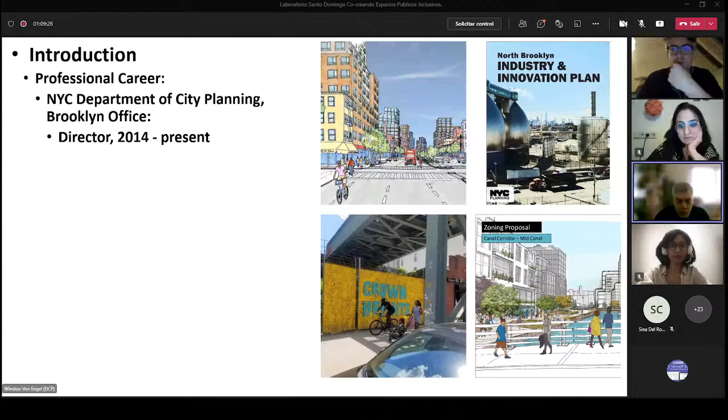Hopefully this walks you through the New York City experience with streets, with streetscape, and how we've evolved over time in treating streets and how we look at them. So first off, who am I? As Roland already introduced me, I'm an urban planner. I work and live in New York City, and my family is from Austria as well as Germany. I started my professional career at the Department of City Planning in New York City in the Brooklyn office, first as a planner for several lower income neighborhoods in Brooklyn, then as deputy director of the office for Brooklyn. In 2014, I became the head of that office. Our office is about 20 urban planners and urban designers working for Brooklyn.

Some of the day-to-day work we do includes conducting studies on land use, on zoning, for economic development. We study our own population—we're actually very good at that, particularly. We also manage the public review process for changes in land use. So when somebody wants to build a different kind of building than what the zoning allows, we review those applications and then submit them for the public to decide.

A bit of an overview of New York City. We're made up of 5 main city pieces, which we call boroughs. We're now at a population peak of over 8.8 million people, despite the pandemic. For the first time in decades, New York City actually grew faster than the rest of the country, and the fastest growing borough was Brooklyn at 9.2%. But just to give you an idea, the population of Brooklyn is now at the same level it was 70 years ago—so we're only catching up to the losses in population from the past 70 years. Other boroughs like Queens, the Bronx, and Staten Island have actually exceeded their prior peaks.

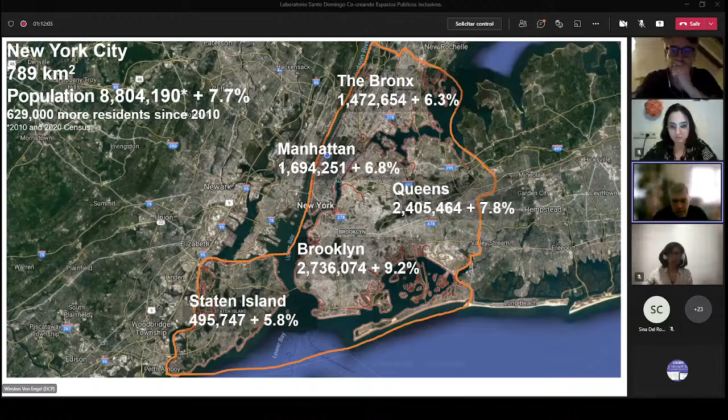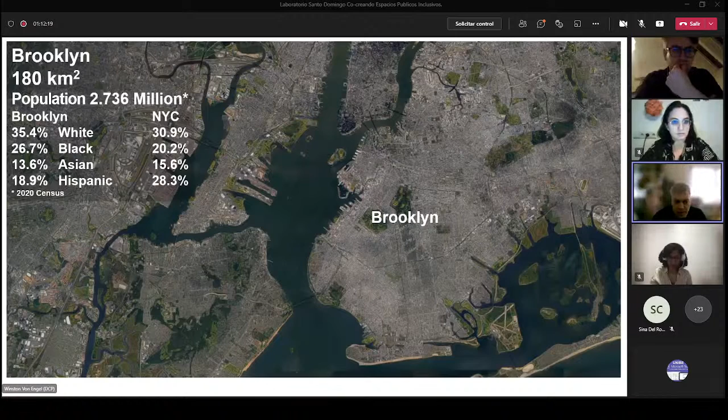Brooklyn particularly has a population of over 2.7 million. We're fairly mixed of white, black, Asian, and Hispanic, made up of many different neighborhoods—from high density in downtown Brooklyn and high rises along the waterfront with the East River opposite Manhattan, to relatively low density in the southern parts of Brooklyn.

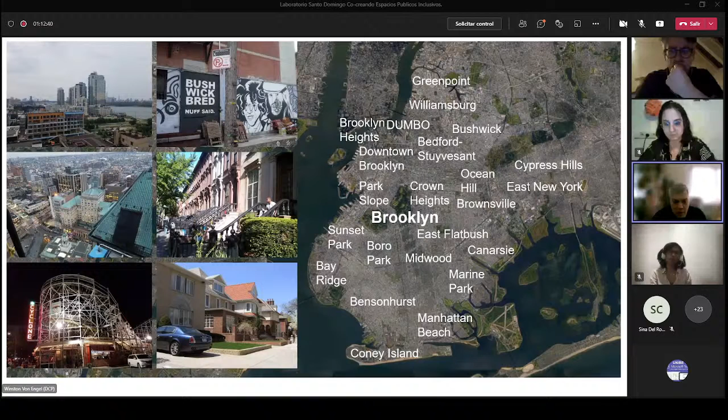Some of our largest immigrant groups are, among others, particularly people from the Dominican Republic, as well as China and Mexico. Probably many of you have been to New York or know people with relatives in New York City. Each immigrant group tends to concentrate in one particular part of the city, often just because of affinity—family members, friends, and services that address the needs of those countries are available in certain areas more than in others.

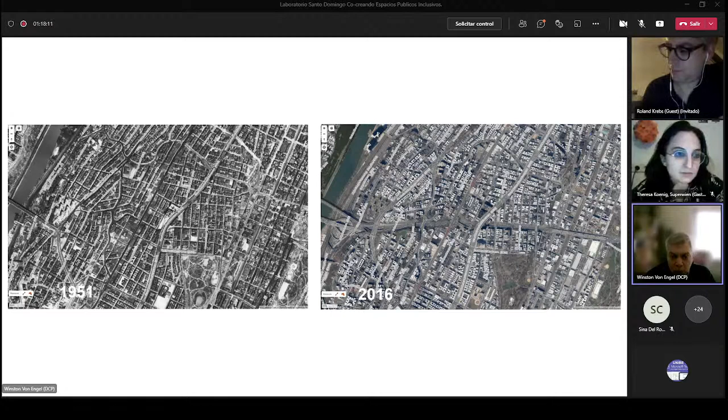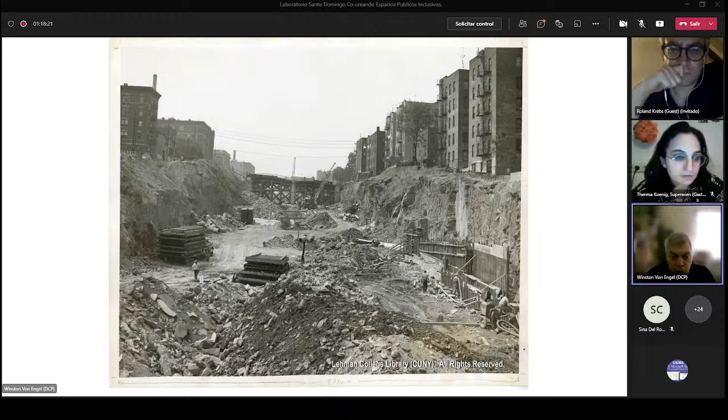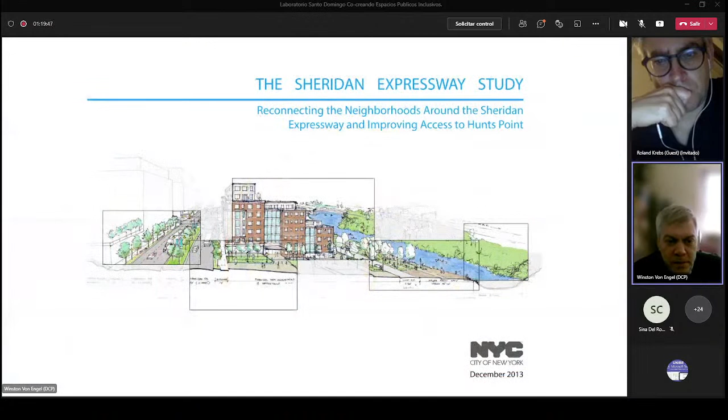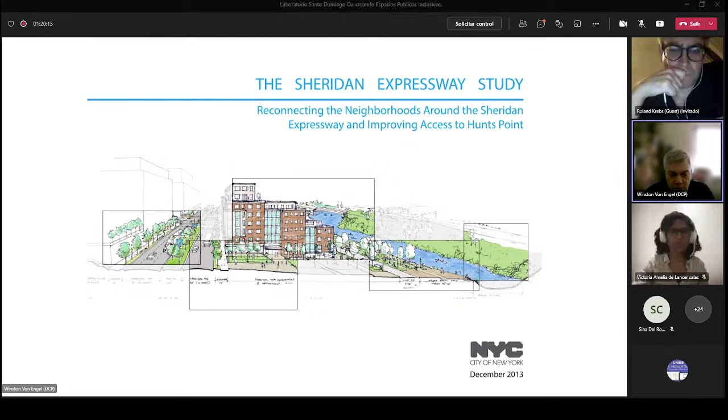You can see its location next to this blue line, which is the Bronx River - there's actually a river through the Bronx that few people know about. Because of this lightly used highway, our agency started an intensive study of whether this highway could be turned into something like a boulevard and decommissioned, reconnecting the neighborhoods on either side with the Bronx River through new development and construction.

Here's an image again of the area of the Bronx on the left in the 1950s, before the highway was built. You can see the Bronx River - it was an industrial area. And then you can see the highway there in 2016.

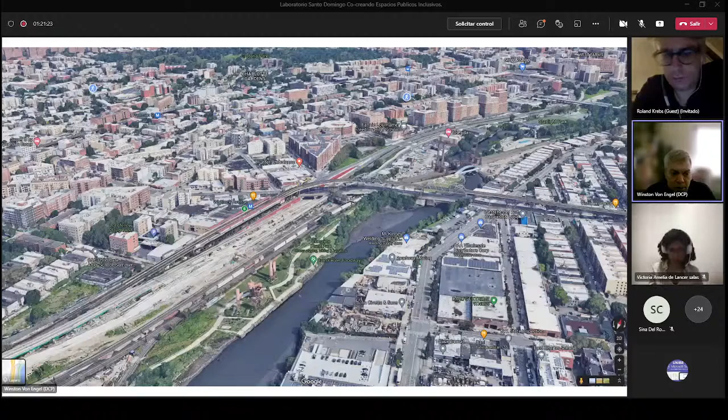Since 2012, after the city - I'll go through some of the steps - this is what the area looks like more or less today. You can see the Bronx River in the foreground, and a green space we call the Concrete Park, a former concrete plant that existed here. You can already see some of the new housing built along the highway, but before the highway actually came down. There's still some roadway left, as well as a railroad and a subway line that goes through.

Overall, the plan that my agency, the Department of City Planning, produced with input and feedback from the community, was one of reducing the size of the highway and turning it more into a boulevard, using open space and housing to try to reconnect and rebuild the fabric that this highway had originally broken.

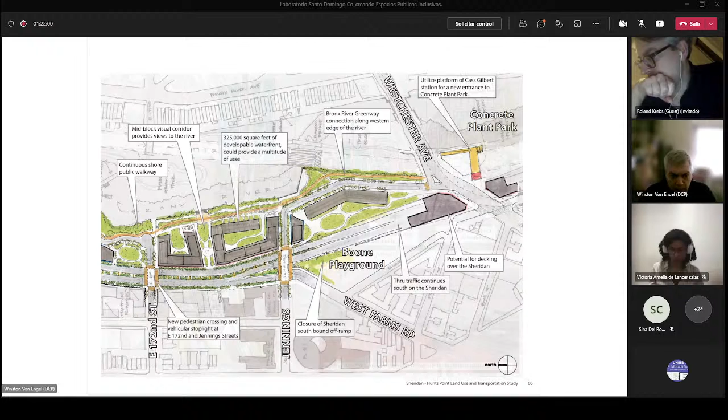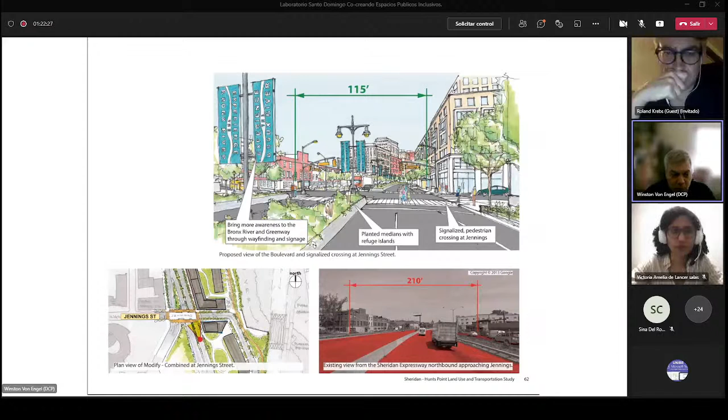Here are some images. On the lower right hand, a view of what the area looked like in 2011, and then one of our urban designers' vision of what you could do if you turned this into more of a boulevard, turning it into more of a street rather than a highway. Here are other examples of how you could narrow the roadway, widen the sidewalk, create green spaces, and allow people to sit and walk more comfortably.

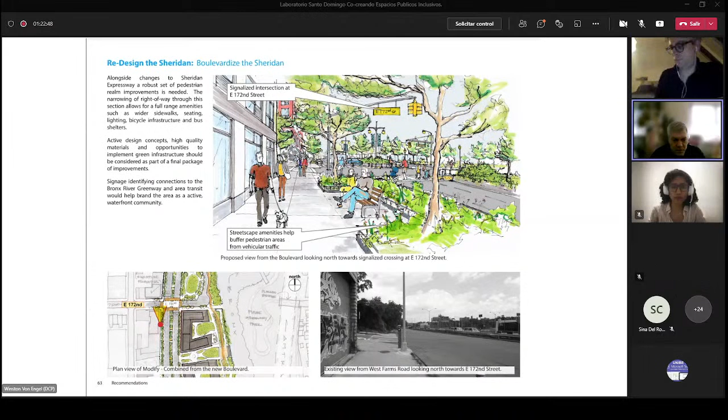In connection with this development, the nearby old unused concrete plant was turned into a park with access or the ability to get close to the Bronx River.

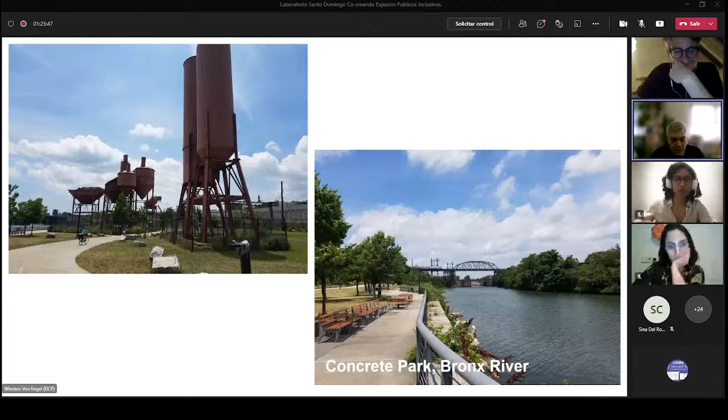So the next story is actually about a highway that is one of the few highways Robert Moses did not build. It's the West Side Highway on the west side of Manhattan, and again it's a story in regeneration. This highway extends along the west side of Manhattan, along the Hudson River. It was an elevated highway built to separate traffic from the industrial uses at street level, allowing trucks and trains and freight to easily access the waterfront without interfering with north-south vehicular traffic. This was a great feat of engineering built in the 1920s.

Then, because of a lack of maintenance in the 1960s and 1970s, a section of the highway actually fell in, and a garbage truck fell through the highway.

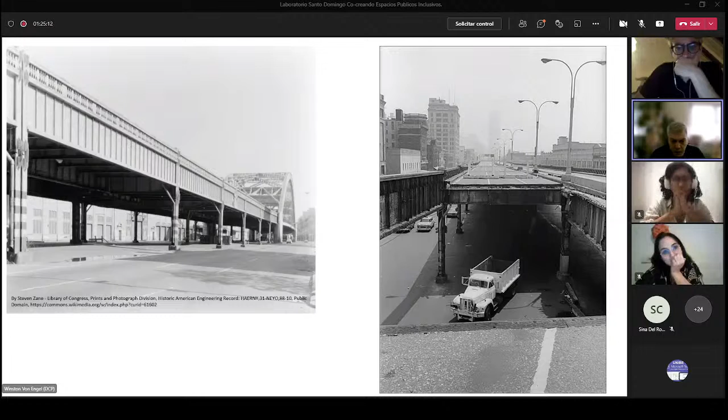For safety reasons, the highway was closed, and the city, together with the federal government, proposed a new highway, partially below ground, partially above ground, and partially in the water, along the west side to replace this elevated highway. This plan actually gained a lot of opposition.

The opposition was because people felt we shouldn't have a highway separating us from the waterfront, that we shouldn't dedicate our waterfront to a highway, and that the money for this multi-billion-dollar project could be spent on other things such as mass transit. There was an option to trade in some of the highway money and use it for mass transit. This was at a time when the city's financial situation was very poor, and it was believed that money could help the city maintain its subways better.

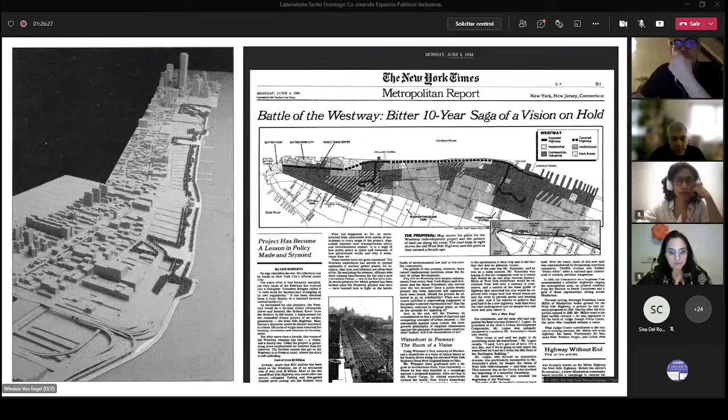Eventually, because of the opposition, the plan for Westway was put aside, and instead the highway was replaced with what we now call an urban boulevard. It's still a multi-lane roadway, but it has landscaped medians as well as a ribbon of green along the water's edge and on either side.

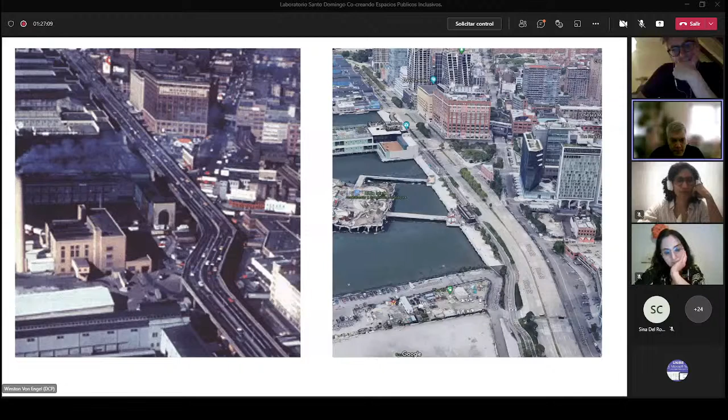This happens to show an image right where the famous High Line Park passes by. It's had a transformational effect on the surrounding area, making it greener and more attractive. Here you can see images along the water with the new parks, as well as the piers that used to be used for large ocean liners and are today used for recreation or other purposes.

This is what it looks like at street level. This was a year and a half ago during one of the Black Lives Matter protests, where bicyclists took over the highway. You can see the bicycle lane and the walking lane on the left side, and the vehicular lanes are where the bicycles are in that image, with the parks and housing nearby.

The one thing I would say about this is that the density on the other side could be higher, and that it should have mandated or included affordable, lower-income housing. This is purely luxury housing—some of the most expensive housing in New York City because of the river views.

Now, a little bit about New York City streets. To us, the gold standard of what an urban boulevard should look like is Broadway on the Upper West Side, the neighborhood I actually live in. The Upper West Side is a very densely built-up neighborhood of multifamily apartment buildings. At one time, in the 1940s and 50s, it was an area where many intellectuals moved because of the abundance of rental housing and the ability to rent good quality apartments inexpensively. Broadway is the main street through the Upper West Side, and it's also the street with a four-track subway line underneath, making it a major shopping corridor.

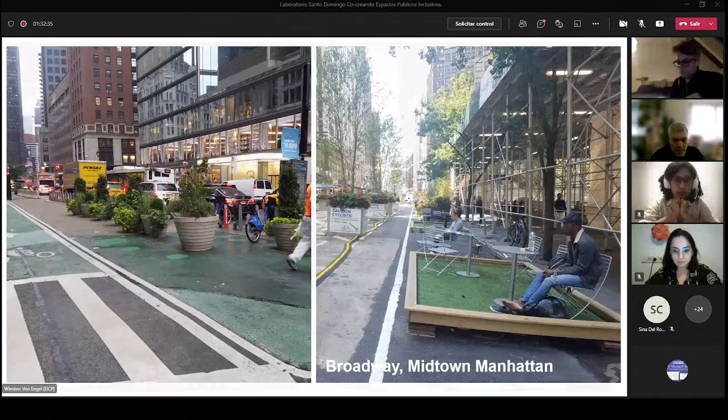The most famous example was her transformation of Times Square. This was something actually fairly radical. I'm told there was very little consultation with her superiors, with the mayor, when she decided to close off Times Square. This is the earliest image I could find of this section of Times Square - this is 7th Avenue, actually Broadway at 42nd Street. This is the center of Times Square, and you can see the very simple way this experiment in closing off this major thoroughfare in Manhattan began.

The transportation department had done a study of how much traffic there was, where it was going, and what would happen if you closed off sections of Times Square to traffic, how the traffic would divert. It was initially termed an experiment for just 6 months. It was immediately accepted by pedestrians, by people in the city, by tourists, and today it has become a permanent fixture.

Broadway between 42nd Street and 44th Street has become a giant living room, an outdoor living room, where tourists and office workers alike are able to gather outside and celebrate the fact that they are in a safe environment from cars and can enjoy the center of New York City.

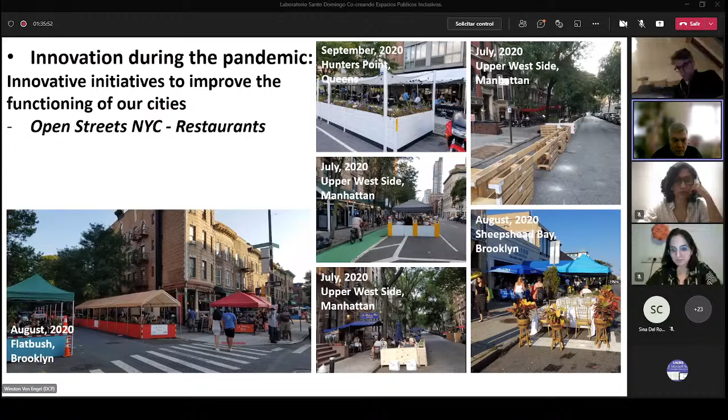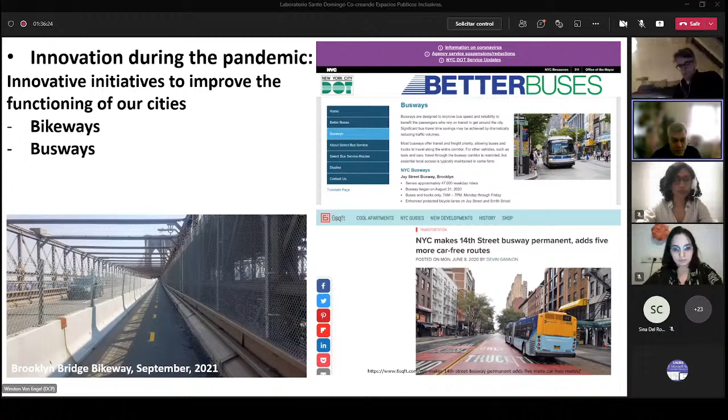And then finally, the city took away a lane of traffic on the Brooklyn Bridge and dedicated it to bicycles, as well as creating bus lanes throughout the city on major corridors, while during the pandemic car traffic was very little. So taking advantage of a crisis to improve and increase the ability for alternative transit as well as for pedestrians, and to make our city much more livable.

The next to last project I wanted to share with you is one that I've been involved in, the last two I've been involved in myself. This is East New York in Brooklyn, and it is about Atlantic Avenue. East New York is a neighborhood in Eastern Brooklyn, which is a very poor neighborhood, and I was actually the planner for it originally when I started work at my agency. I chose this neighborhood because I had done a planning studio as part of my studies when I was in college at Pratt Institute.

This area was part of a neighborhood plan we created with the community and elected officials that will result over time in over 6,000 apartments, about half of which we believe will be affordable to lower income people, with new schools, a new elementary and middle school, a new landscaped median, a new Atlantic Avenue, parks, a youth center, and a job training center.

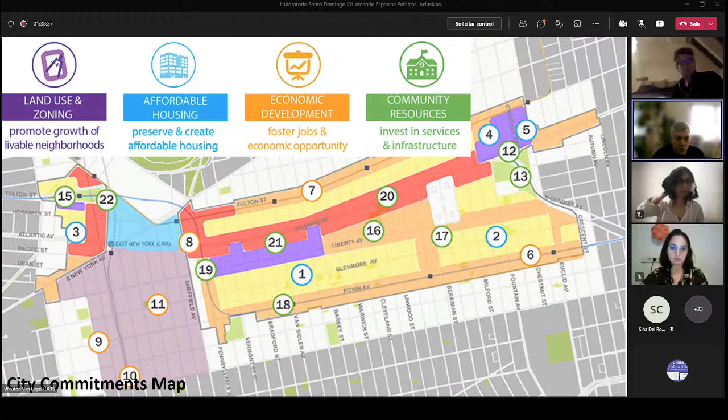We developed a planning framework with the community and identified strategic improvements throughout the neighborhood to either improve open space, develop recreational programs, or improve economic development. This was our vision for Atlantic Avenue in 2016.

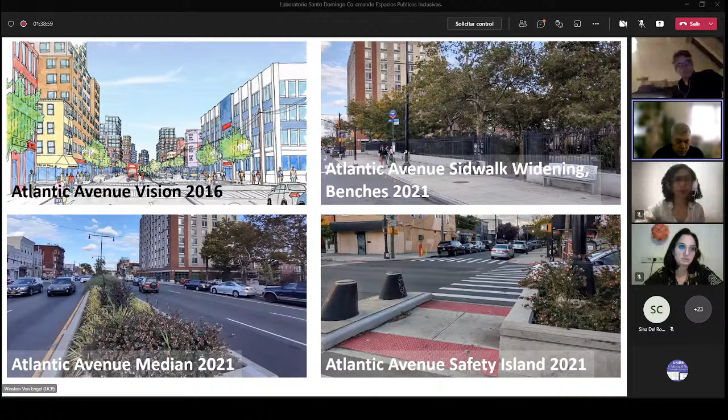One of the things I am most proud of is the work we did along Atlantic Avenue. I have some more images of this. This is part of the Department of Transportation's work — they identified this stretch of Atlantic Avenue as an opportunity for a great street.

If you look at these before images, Atlantic Avenue was pretty dismal. It had a very low median, and the zoning on either side did not allow any housing. It was still industrially zoned, with only fast food, a few restaurants, and gas stations. It was a divider between the neighborhoods to the north and south.

It was also a place where many pedestrians were often involved in crashes — hurt or killed — as well as car-to-car crashes, because the median was low and cars made strange turns across it, or illegal U-turns to get from one side to the other. So we worked with our colleagues at the Transportation Department to convert Atlantic Avenue into a boulevard.

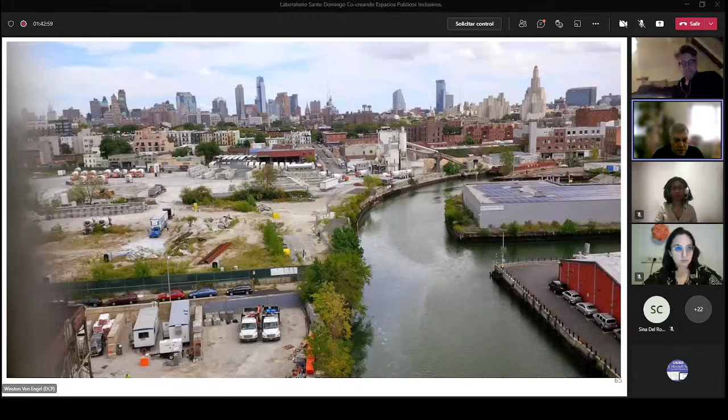The last project I wanted to share is another one I worked on, called Gowanus in Brooklyn, and I want to particularly draw your attention to the Gowanus Canal. This is an old industrial neighborhood in Brooklyn centered around an old industrial canal, with industrial uses still remaining on either side, but a lot of vacancy, surrounded by a very strong, affluent, rich white neighborhood.

The area has slowly been turning into an entertainment district, with breweries, restaurants, rock wall climbing, shuffleboard, and other things that address the needs of the surrounding community. So we did a planning project here.

We worked together with the community and the local council member and other local elected officials to envision what we could do to improve and change this area of Brooklyn.

We put together a website that allowed people to submit individual comments, like 'I'd like to see more trees here,' 'I want access to the water,' or 'I'd like better, safer streets here.' We were really impressed by that response, and we used it a lot to inform our recommendations.

The Gowanus Canal, if you think about it, acts almost like a street. It is not accessible to pedestrians. It has limited points at which you can cross it, but we use it, and we actually mandate in New York City that if you build along the water, you must provide access to the public along the water's edge. So we worked very hard on urban design principles to guide the design of the waterfront, as well as the buildings that line the canal, so that there was a variance in the architecture and the expressions possible, but there are also certain principles maintained of what we call street wall and setbacks, as well as stepping down to the nearby neighborhoods.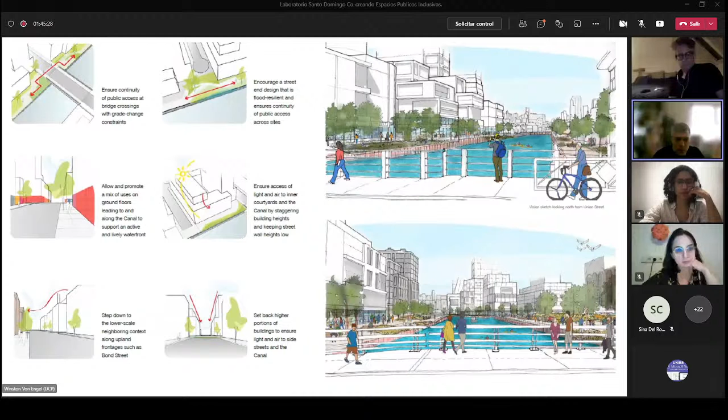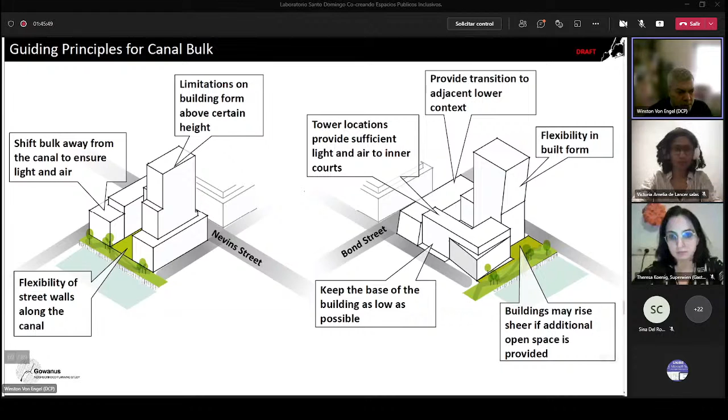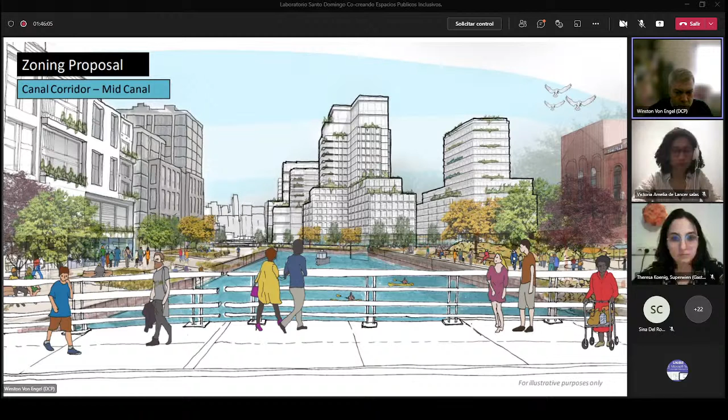Here are some images of the principles, where we allow towers to be in different locations and to set back, but keeping certain principles in place. This was our vision for what a build out here eventually might look like, with new residential buildings on either side of this landscaped waterfront. There's another one that spells out some of these urban design principles about buildings setting back, about buildings also aligning with the streets and allowing for articulation of facades to make it a more interesting and attractive streetscape.

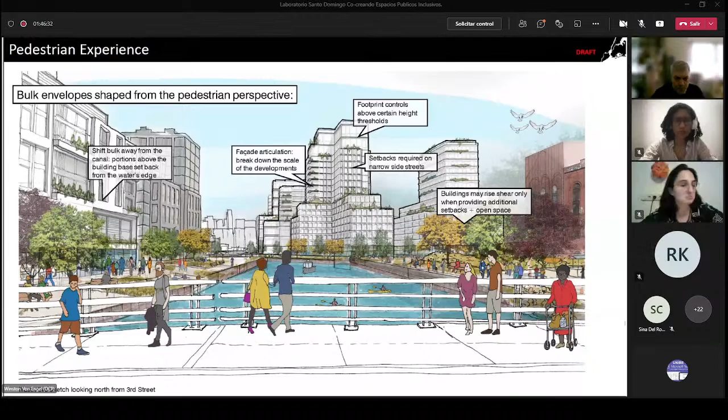That concludes my presentation. So thank you.